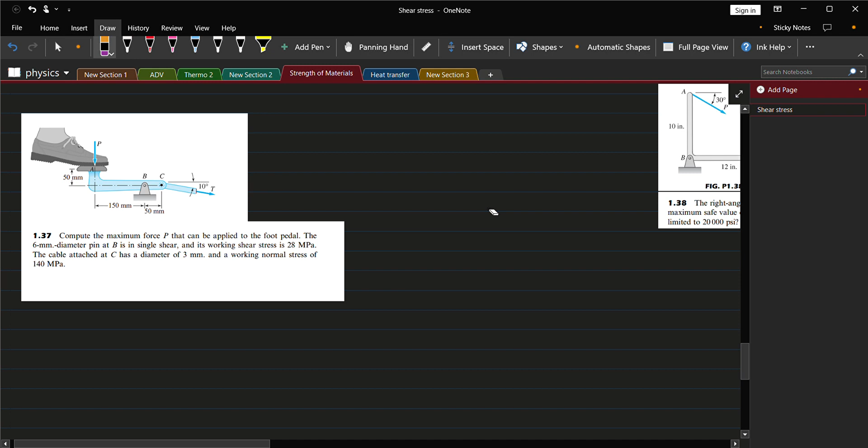So our topic is about shear stress. This problem asks us to compute the maximum force P that can be applied to the foot pedal. The 6 mm diameter pin at B is in single shear with a working shear stress of 28 MPa. The cable attached at C has a diameter of 3 mm and a working normal stress of 140 MPa.

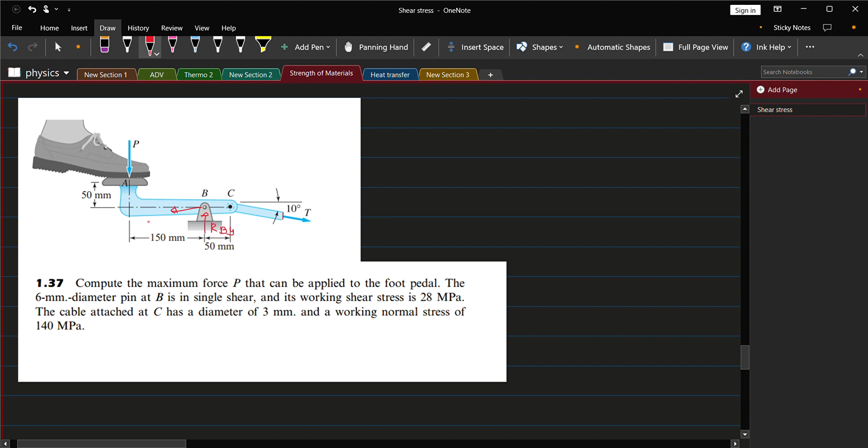So we will have a reaction here at B, upward, which we'll call RBY. We will also have a horizontal direction which we'll call RBX. To find these forces, we use summation of forces in the X and Y direction.

Summation of forces in Y direction is equal to 0. So we'll have negative P minus T sine of 10 plus RBY is equal to 0. So RBY is equal to P plus T sine 10.

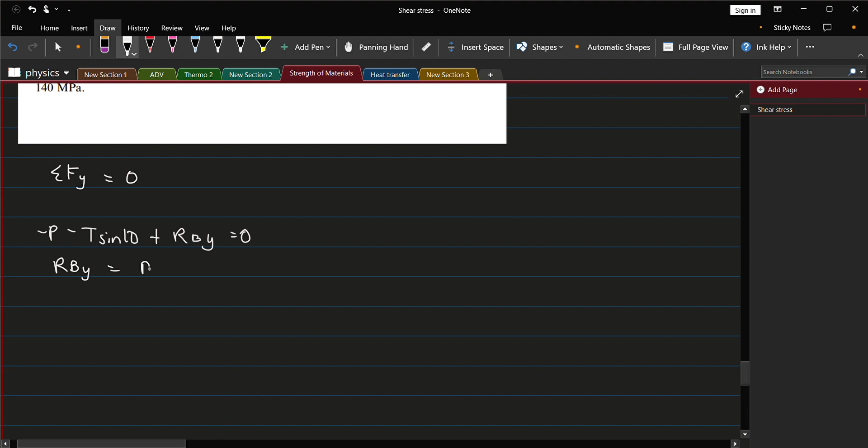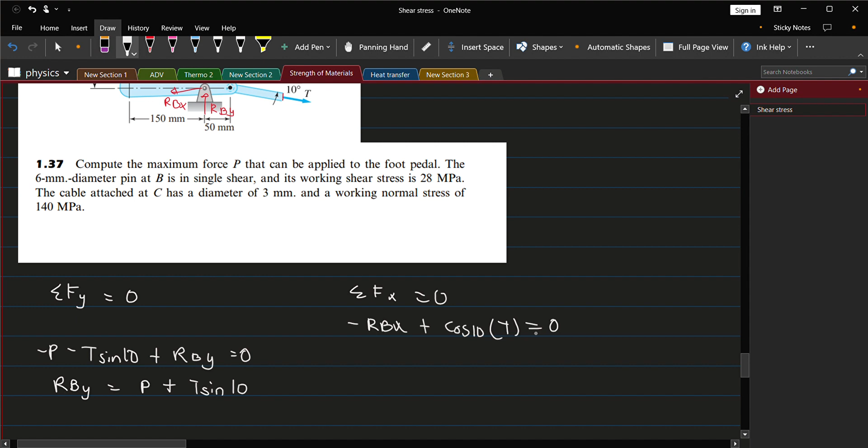Summation of forces in X direction is equal to 0. So we have negative RBX plus cosine of 10 multiplied by T is equal to 0. So RBX is equal to cosine 10 multiplied by T.

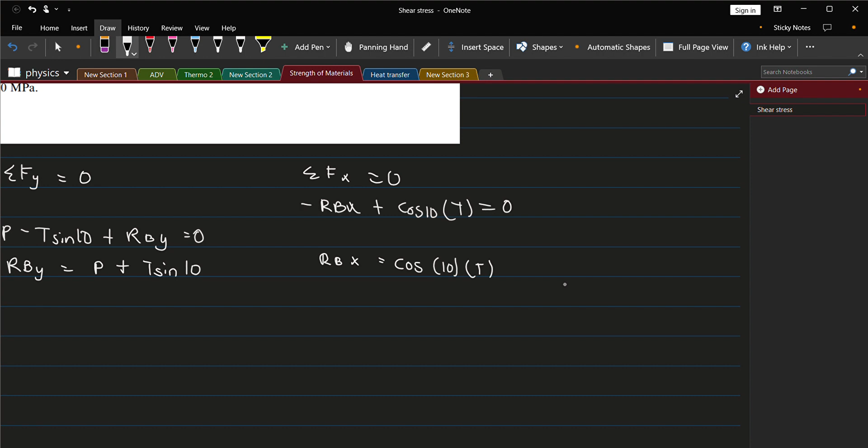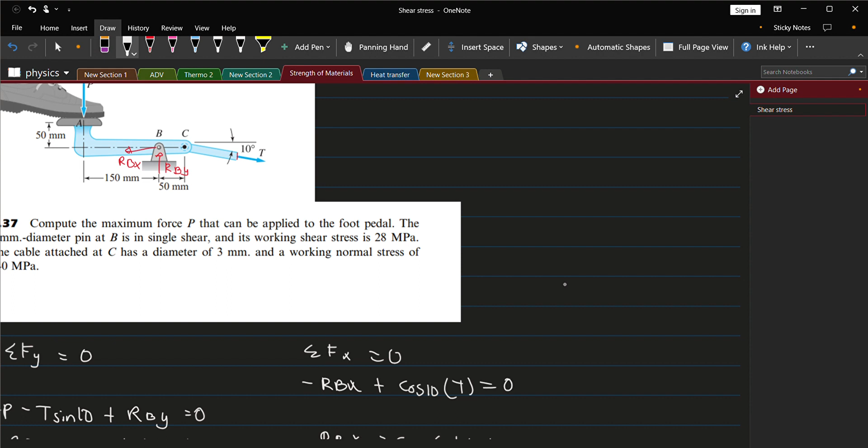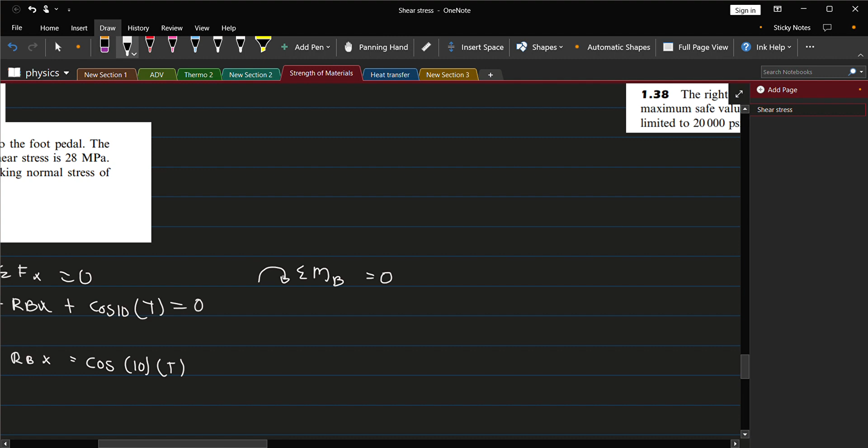So, summation of moment at B, so that our reactions cancel out. Then we can get the force P using the force T. Summation of moment at B is equal to 0. Clockwise we take as positive, that's our convention.

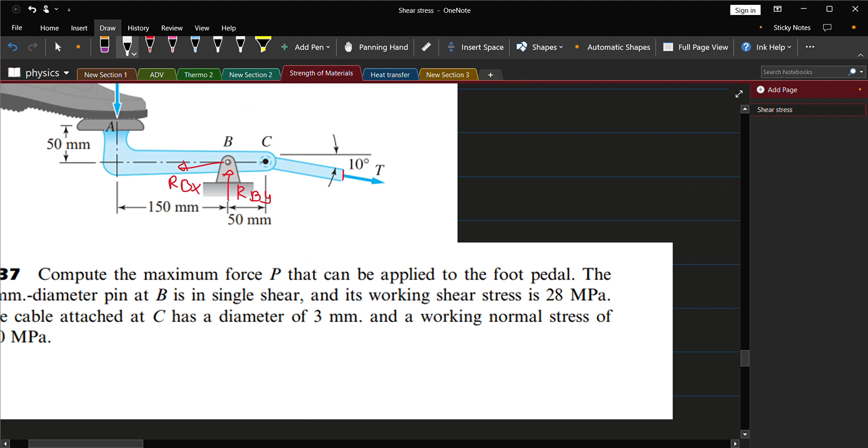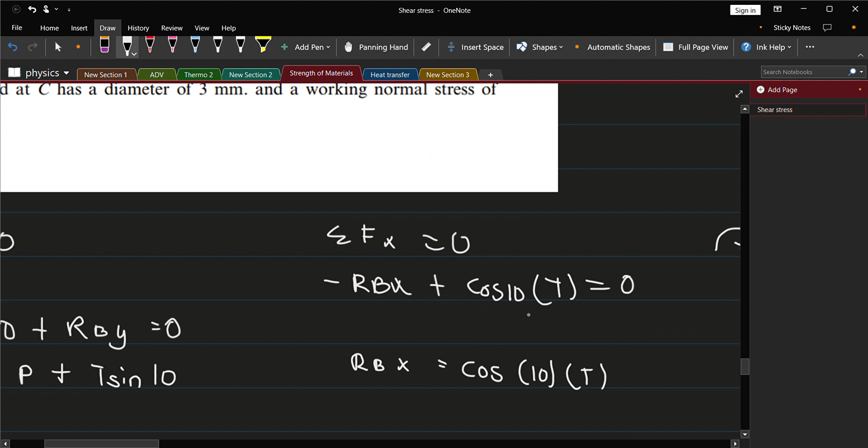Then we have force P multiplied by 150. It's negative because its rotation is counterclockwise. So negative P multiplied by 150 is equal to 0.

So using algebra, our T becomes 17.2763P.

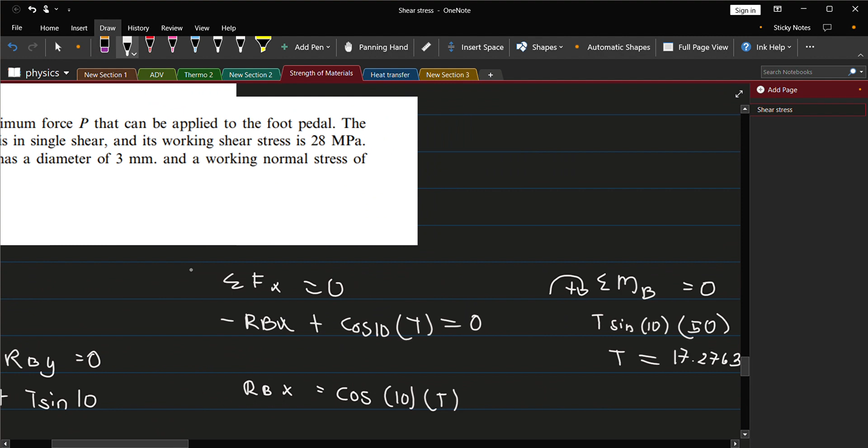Using this, we can substitute to get the force P in terms of normal stress. Our formula for normal stress is sigma equals the force perpendicular to the cross section, divided by the area. So we need the force, which is equal to sigma multiplied by the area.

So our force is 17.2763P, which is equal to 140 MPa, or Newton per millimeter squared, multiplied by the area, which is pi over 4 times the diameter since it's in terms of diameter — pi over 4 multiplied by 3 mm diameter, 3 squared mm squared. So our unit mm cancels out.

So we divide by 17.2763. Our force P now is equal to what? Let's use the calculator: 140 multiplied by 3 squared divided by 17.2763, giving us 57.2809.

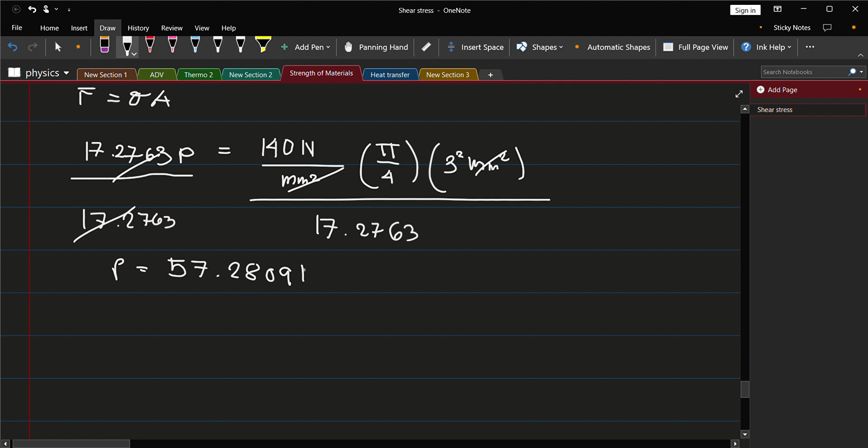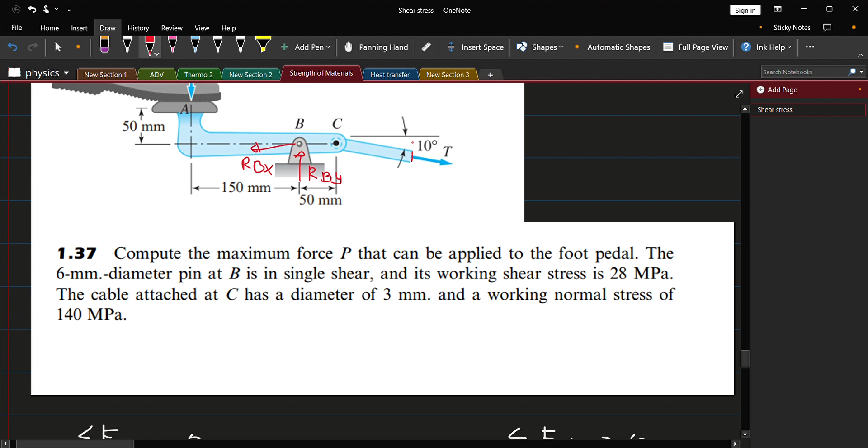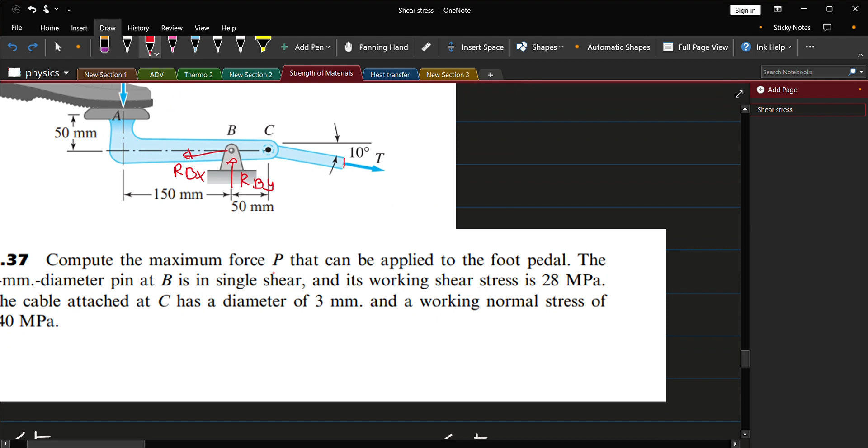57.2809 MPa — oh, it's actually Newton. So this is our force, for this cable. Wait, no, this is actually the maximum force P to apply, not this one. So now, let's solve this using the reaction at the hinge at B.

So what we'll do is get the resultant. We will have the resultant equal to the square root of RBX squared plus RBY squared. So we need RBX and RBY squared. So the value we got earlier is the maximum that our cable can support.

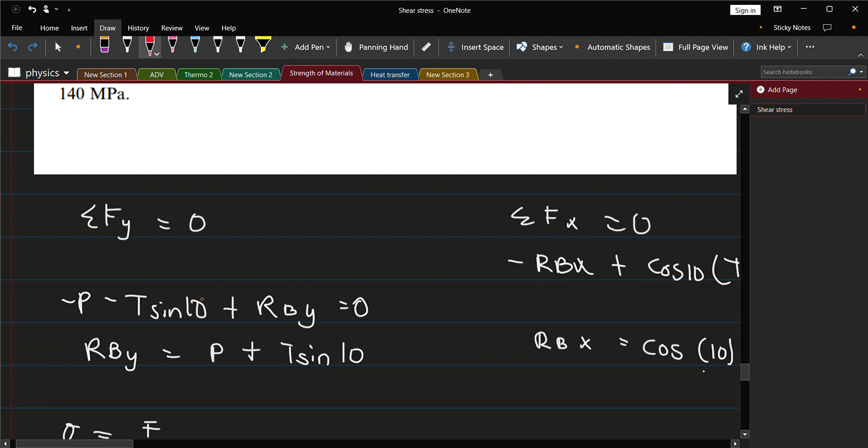So now let's get the one at the hinge. We have RBX from earlier, which is cosine 10 times T, and T is equal to 17.2763P, so we'll substitute that here. So R is equal to cosine 10 squared, and cosine multiplied by 17.2763P...

...squared, plus RBY, which is P plus sine of 10 multiplied by T, which is 17.2763P, squared.

So our R now, using algebra... we'll get — no, let's not skip this, let's do it for you. So we have cosine of 10 multiplied by 17.2763 squared, giving us 289...

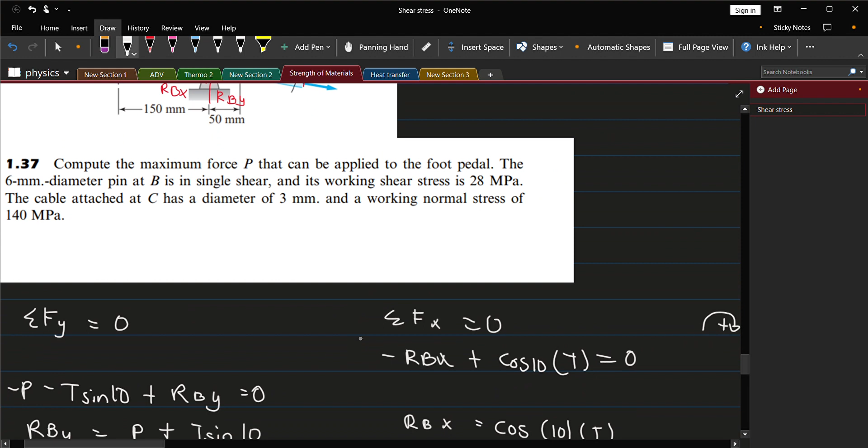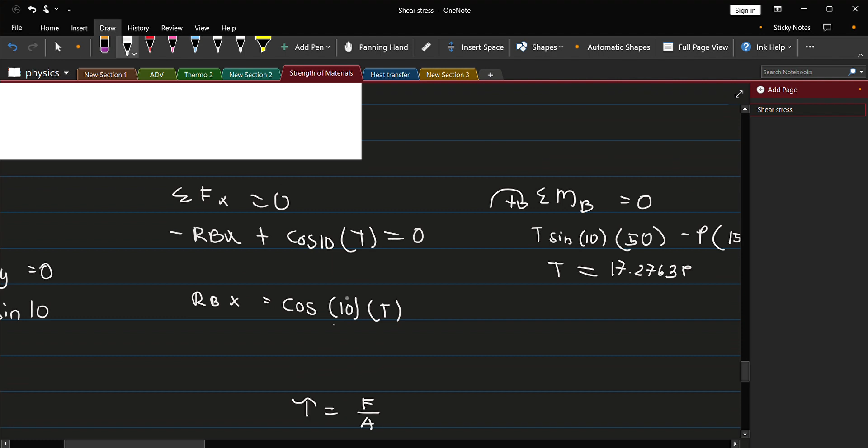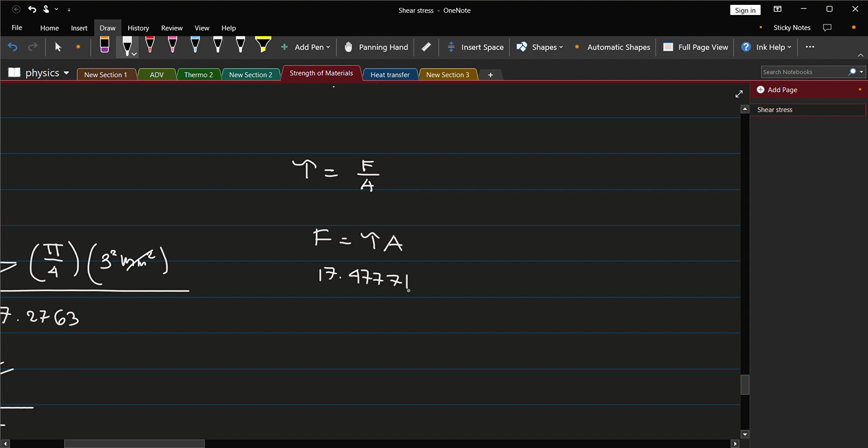Our shear stress tau is equal to the force over the area, where the force is parallel to the cross section. So force equals tau multiplied by area, and our force now is 17.4777P, equal to 28 Newton per millimeter squared multiplied by the area.

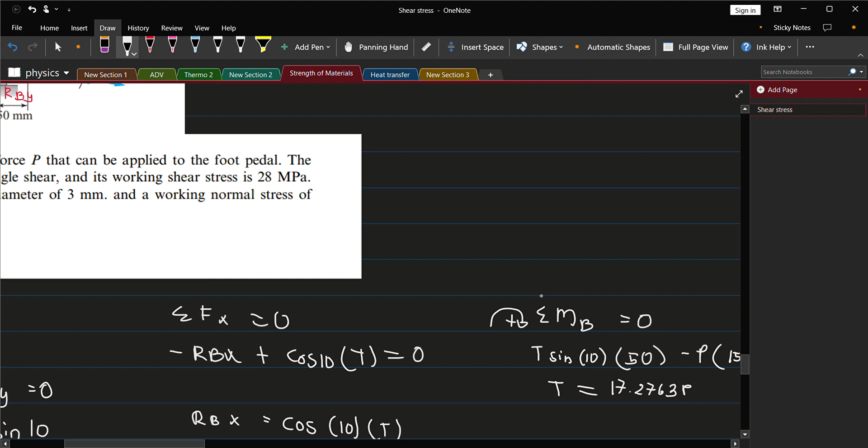What's the diameter? It's 6 mm diameter — 6 squared mm squared multiplied by pi over 4. So we divide it by 17.4777.

So that cancels, and what remains is P equal to... wait, why did I put 20? It's 28, guys. We'll have 28 multiplied by 6 squared multiplied by pi over 4, divided by 17.4777, giving us 45.29667 Newton force.